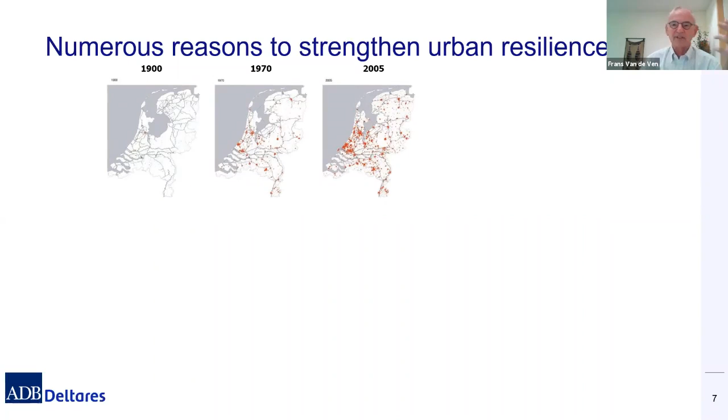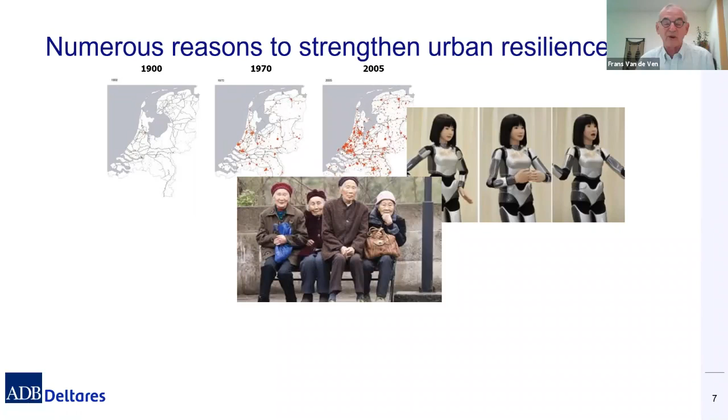But what makes urban resilience so important? Why? What is the reason to strengthen that urban resilience? And that, of course, starts with the whole issue of urbanization that is going on worldwide. Our cities are rapidly growing. But we also have an aging population to take care of. That is, the demands will change over time. We have a robotization going on in society. We are talking about smart society, about Internet of Things. That will definitely change the way we deal with our community. Like this webinar is no longer a meeting in person, but it's broadcasted via Internet.

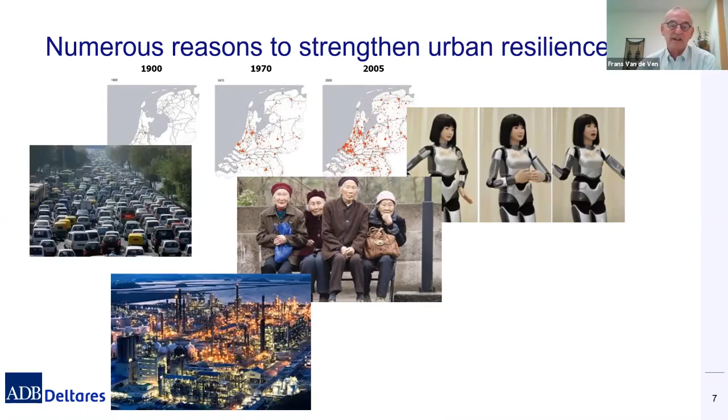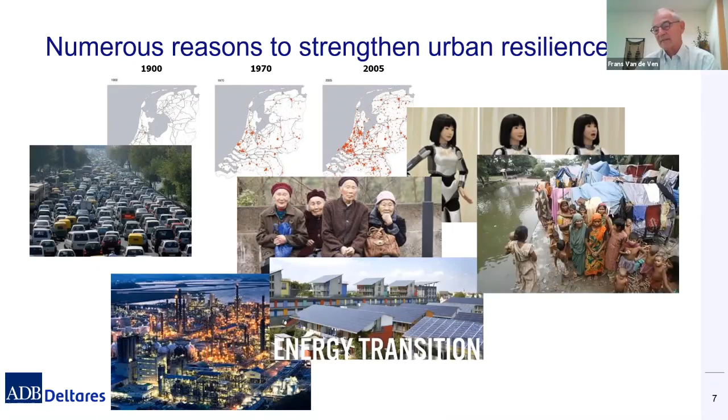We have a densification of the city going on. The city is becoming more and more dense. To avoid urban sprawl, we start densifying our cities, but that makes the risks increase over time. Mobility is changing, as everyone knows. We have an energy transition to take care of. We have gender issues and income issues to take care of in urban resilience. And last but not least, there is a lack of money all around the world.

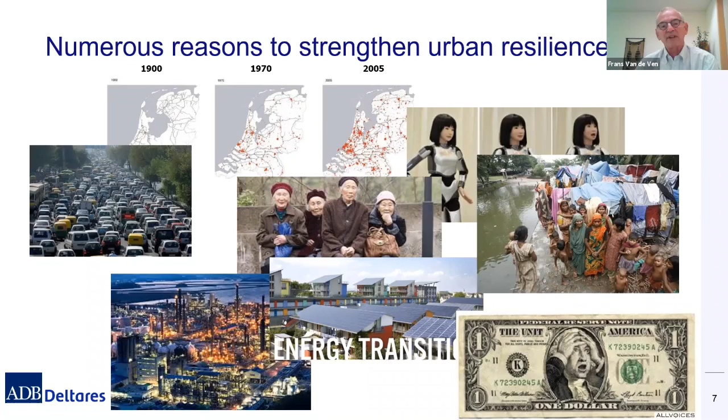So the struggle for money is going on everywhere, and so we have to be very, very careful with the budget. And of course, there is that issue of climate, not only climate change, but existing climate. We already suffer from flooding, from river flooding, coastal flooding, heavy rainfall. We suffer from droughts, not only bringing dry gardens, but also threatening the stability of our levees, introducing land subsidence and so on. And we have that heat issue.

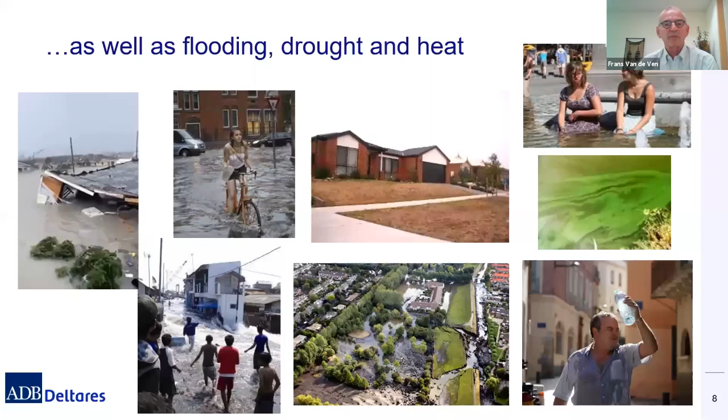And that heat issue, as is illustrated in a couple of pictures here, can only be dealt with if we have sufficient water to cool our cities. That water is an important coolant medium for our cities. But it's not only about threats and challenges that we have to talk about resilience. It's also about the opportunities to use water as a resource to improve urban resilience.

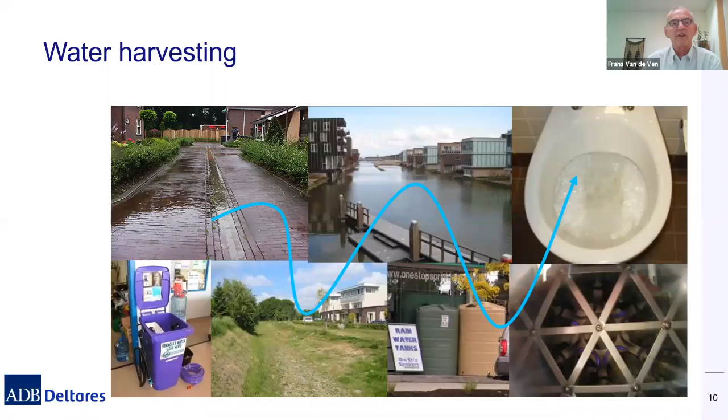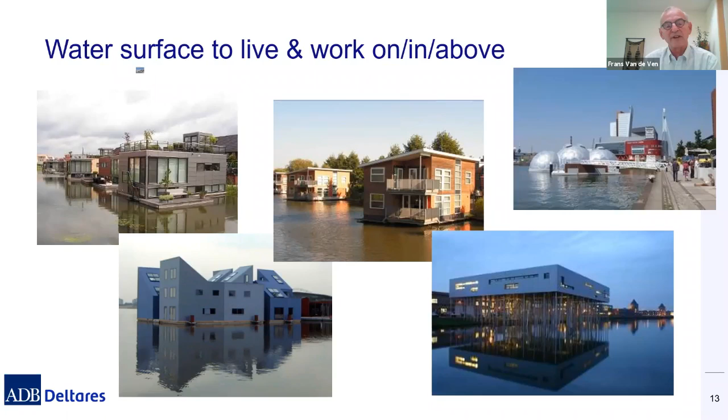To give just a couple of examples, first of all, let's think about water harvesting, about the introduction of more sources than one single source of water supply from the public tap. Rainwater harvesting is becoming an issue worldwide, I think, to diversify our sources. Then, we can make better use of these water surfaces. We can build on them. We can float on them, above them. Water surfaces are not areas that you cannot use. They can be used in very different ways in the urban environment.

Water and green are of course important for biodiversity, but can also be used for food production in our urban environment. Urban agriculture is picking up rapidly, and I think that is a way that will develop in the next decades pretty fast. Water and green is used for recreation and well-being for the people of the city. That is quite clear. Water is appreciated in the urban environment as an amenity if it is clean and accessible. So we can develop that capacity as well.

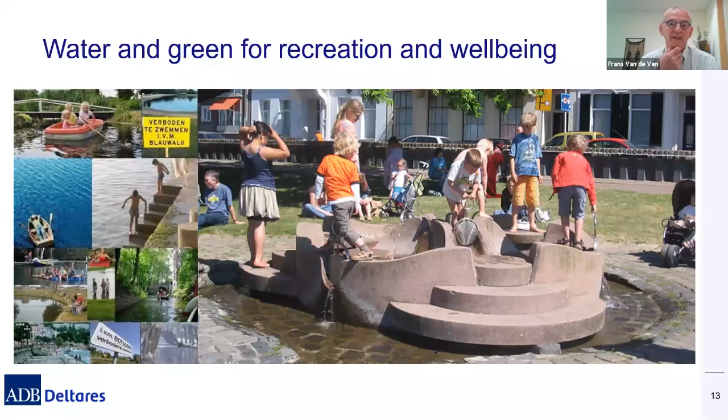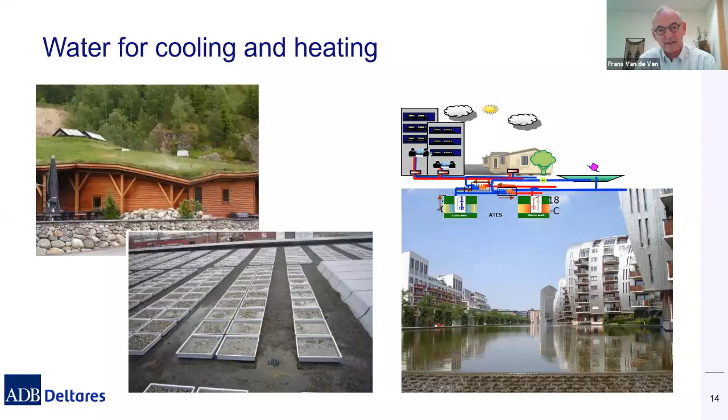And as I said, water is also a coolant for the city. So it cools the heating. But at the very same time, these water surfaces can be used as an energy collector. The water surfaces collect enormous amounts of solar heat that we can use in our urban environment for heating if necessary. All these options are possibilities to improve our resilience in our urban environment.

And that brings me to the issue of resilience planning. Resilience planning is by any means a sort of tiered approach. We have to take 3 steps. The first step is to scan the vulnerabilities of the urban environment. We call that stress testing the urban environment for climate and climate change. The second step is the selection of strategies to reduce that vulnerability and to set targets. That is an important step to prepare for the last step. And the last step is to select the adaptation measures in our environment. And I will briefly walk through these 3 steps, of course, focusing on step number 3.

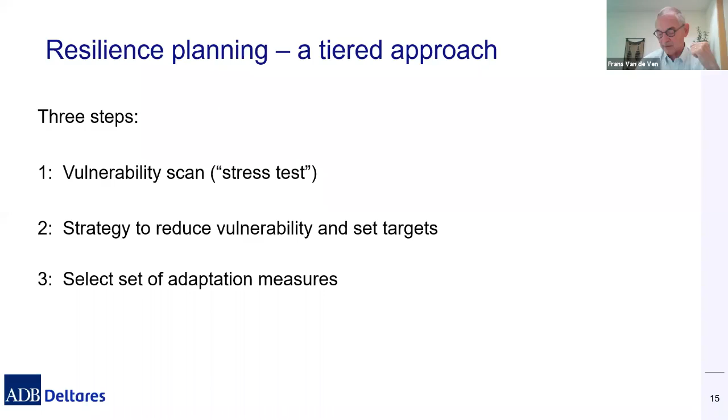Step number 1 is, of course, where we have to include issues like flood hazard assessment, to see where the hazards are, where the city is exposed to these hazards, where the risks are, the sensitive objects, where the vulnerabilities are. This is the type of analysis that is to be made in step number 1 to make a complete overview of all the vulnerabilities. This is to be done for flooding, but also for drought and for heat stress and maybe for land subsidence, so also for the other issues that are at stake in the physical environment of our urban areas.

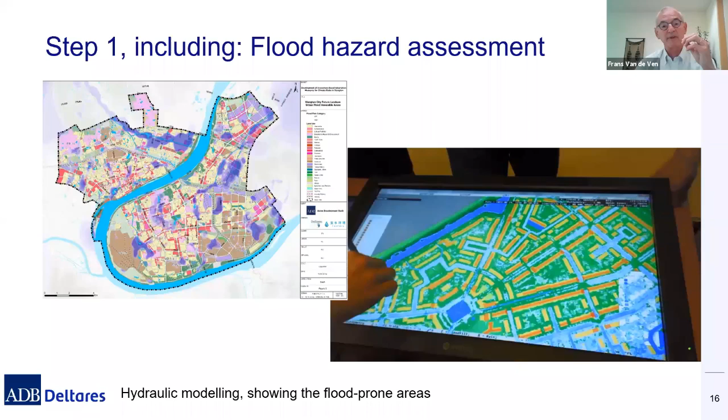Moreover, we have to take a look at the soft side of the urban environment, the governance and the institutional arrangements, to see where the weaknesses are in these institutional issues. This could be done, for example, by analyzing the so-called primo chain, making an analysis of the existing policies, the existing regulatory frameworks, the capacity to implement solutions, to maintain solutions, and the organization and financing. This is called the chain approach because the chain is as strong as its weakest link, as we know. So if one of these links is weak, we will have a problem introducing these solutions.

And then it comes to strategy, and one of the first steps in strategy that we are all very much aware of is the fact that nowadays we have to retain and store the water instead of draining the water. The Chinese term of sponge city approach is very well known. We need a sponge capacity to avoid areas being flooded. Water is to be retained and detained where it comes from the sky and stored locally, so that we don't need to drain it right away, and so that we can avoid large flood peaks in our river systems.

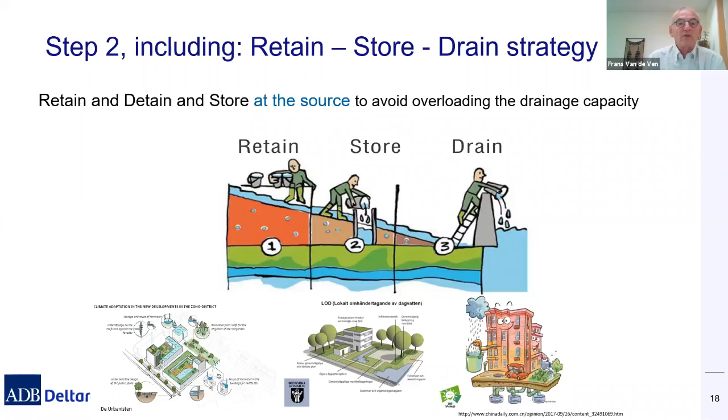But okay, that is an important strategic component. Retain and store before draining it. And that brings us to, in the Netherlands, what we call the multi-level protection strategy. At level 1, we need strong levees, strong dikes to protect us from the rivers and from the coasts in our delta areas.

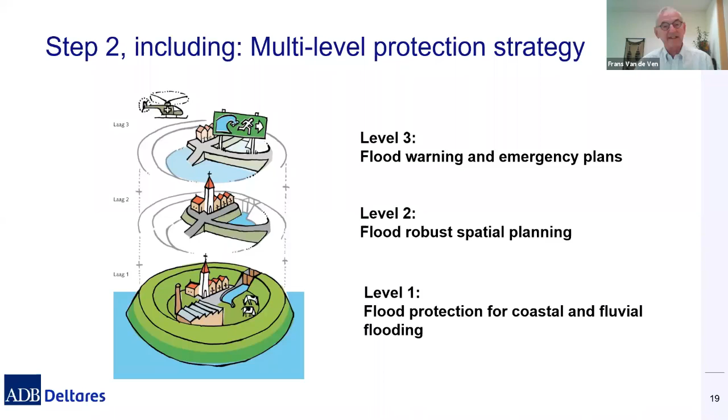But that is not enough. The fact that we create this levee system also introduces an inland area that is like a bathtub. And if it's raining heavily, that bathtub will fill up. So we need measures to avoid flooding in these lowland areas, and that's why we need flood-robust spatial planning. In addition to that, at level 3 we need flood warning and emergency plans, of course, to prepare for anything that could happen to us. This is a strategy for flood protection.

Then we need a so-called 3-point approach for resilience. And this is, I think, a very important step as compared to the past. In the past, we made an analysis of what was needed with a certain return period. And as a hydrologist, as a hydraulic engineer, we made a design for a levee or a pumping station or whatever was needed to protect us up to that certain level. Up to once in 10 years, once in 100 years flood, whatever.

But 2 more points are very important. This is a point that happens 365 times per year. That is the everyday situation. If your solution that you have designed for this extreme situation is not contributing to everyday value, well, that is a missed opportunity. So we should develop solutions that also contribute to the value of the urban environment every day.

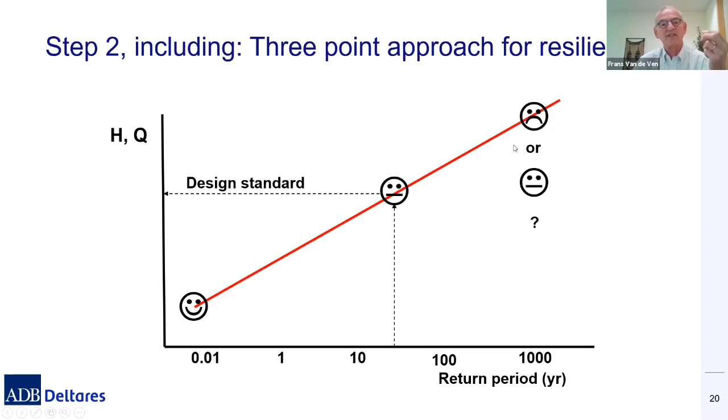The third point is another issue, and that is, well, it's clear that every now and then, whatever design we make, this criteria will be exceeded. So if you design for a once in 100-year flood, if the once in 200-year flood comes in, your system is allowed to fail. Well, when it fails, we should, of course, minimize the damage of that failing system. That is the other challenge that we have to take care of, and that is one of the strategies to make our design so that we minimize the damage of that failing system. And this is the so-called 3-point approach for urban resilience.

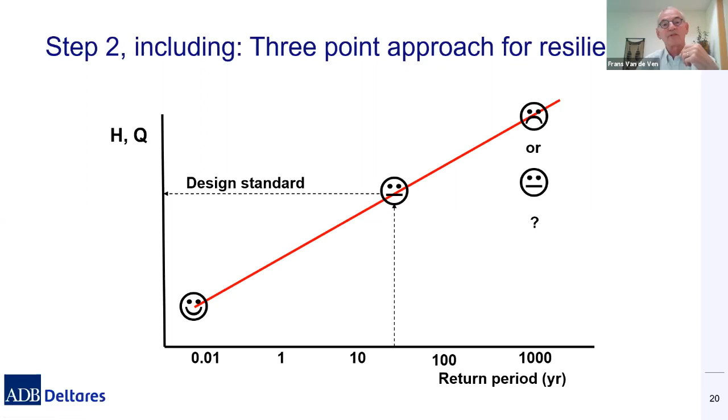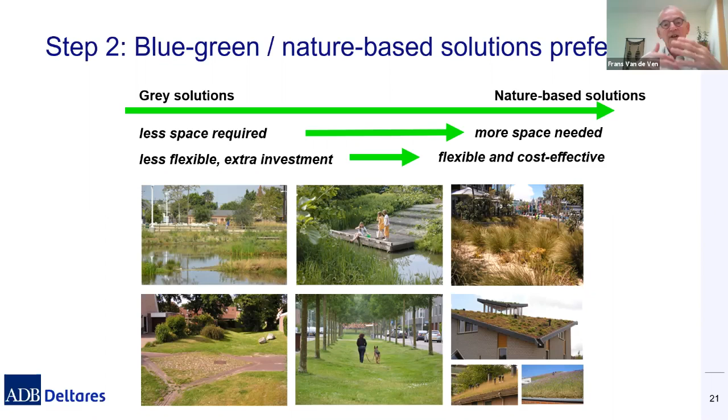And last but not least, the last component I would like to bring up is the movement we see from traditional gray, underground, invisible solutions to nature-based solutions in the urban environment. And well, let's be honest, if you see these pictures, it needs no explanation why these solutions are attractive to the urban environment. They create extra value to this urban environment and to the everyday situation. They are more flexible and turn out to be cost effective, despite the fact that they need more space. They take urban space. So this is a movement that we have to consider when we move to our next step. And the next step was adaptation planning.

Well, in that adaptation planning, we first of all have a problem to deal with. And that problem is the fact that we have simply too many solutions. It's not the problem that we have no solutions in climate resilience. It is the problem that we have many solutions, many blue, green, and gray solutions are available. Whether you call them ecosystem-based adaptation, nature-based solutions, sustainable urban drainage systems, whatever you call them. The problem is we have to make a choice.

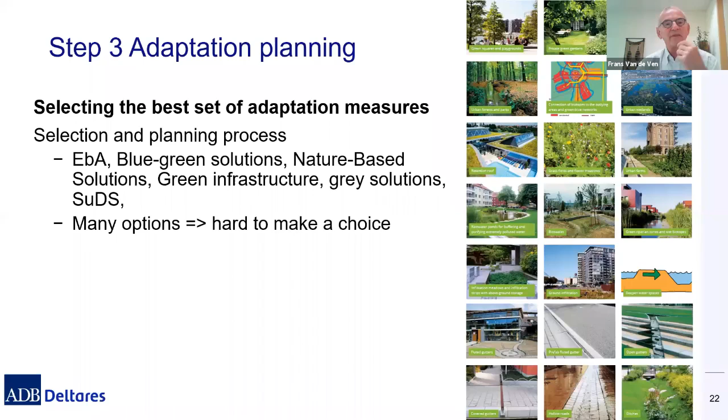And if you want to make a choice, we have to take into consideration very many disciplines and aspects when implementing these solutions. So it's quite hard to make an evaluated choice, and it's in that context we need collaborative planning. We need the co-design of solutions. As you can imagine, these blue-green solutions require many different fields of expertise: urban planners, drainage experts, landscape designers, project developers. Everyone has a say and has to have a say in the design of these solutions.

The more so because all these stakeholders have to support the plan that is to be developed and implemented in the end. Such solutions, as a result, will be very location specific. It depends on local knowledge and local preferences what will be implemented in practice. The solution for city A can be completely different than the solution for city B.

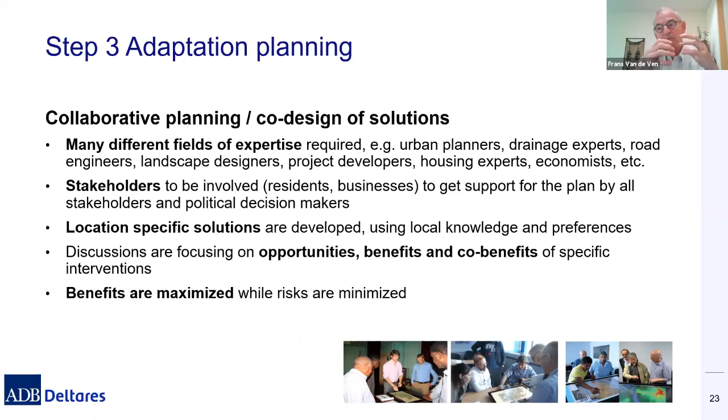Moreover, the discussions that we have during that collaborative planning process tend to focus on the opportunities and the benefits and the co-benefits of these specific interventions rather than on the cost. So there is a balanced discussion about not only the cost of these interventions, but also the opportunities, benefits, and co-benefits. And indeed, we can say that during these discussions, the benefits are maximized while the risks are minimized. And maximizing the benefits is a very important step to take in this discussion.

So if it comes to planning support tools, well, we should have support tools that facilitate and structure the discussions among all these experts and the stakeholders, the local representatives, and how to organize that process. Moreover, it should fit the structure of our planning and design process, which is often even a legal structure.

But in general, this is characterized by an initiative phase and a design phase. In the initiative phase, ending with the program of demands, and the design phase starting with the conceptual design, and then finally moving towards the final design ready for implementation.

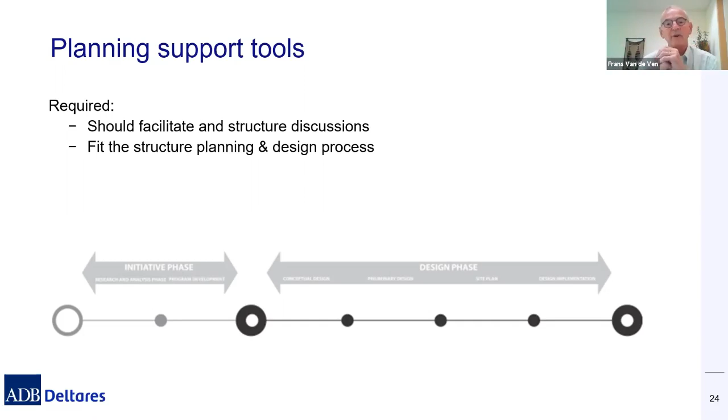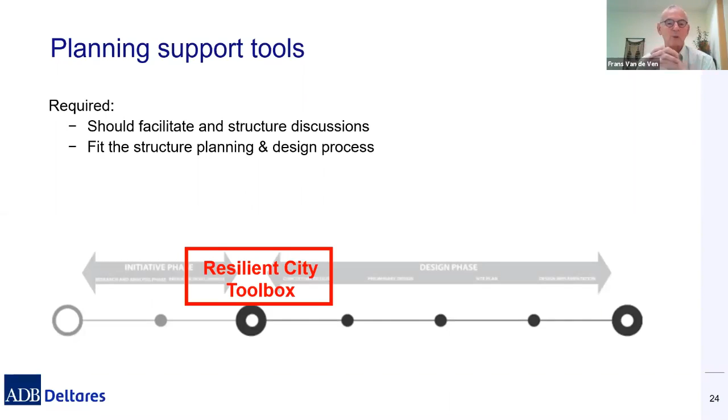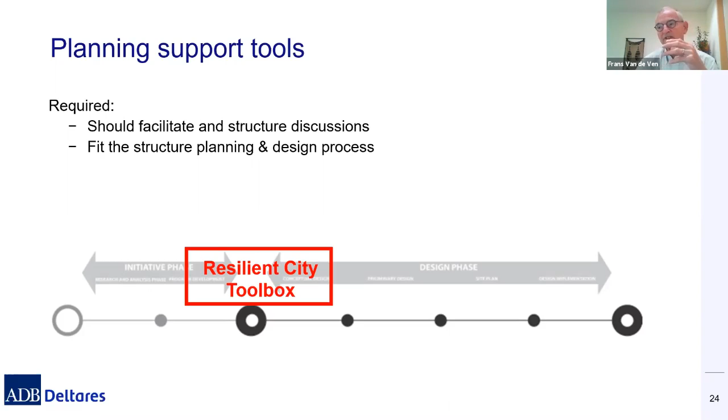And this is precisely where the Resilient City Toolbox comes in. Because at the end of the formulation of the program of demands and at the beginning of the conceptual design, that is the moment that people can sit together and discuss options and opportunities. And that is precisely what the Resilient City Toolbox is meant for. The output of the Resilient City Toolbox, as you can see, is input for the further design phase, for the detailed design.

So asking yourself the question, what is the Resilient City Toolbox meant for? Well, it is, first of all, meant to support the dialogue with all the stakeholders, the experts, the local representatives, the financiers, the constructors, about the options and alternatives. Which measures can be implemented where and how? That is the key question we would like to answer in using the toolbox.

The toolbox provides first estimates of the hydrological effectiveness and the costs of the measures. These are first estimates, enough for this preliminary phase of design, insufficient for the later phase of design, but it gives you an opportunity to discuss the pros and cons of different alternatives. And the results are shown on a map. The people are contributing to that map to see what can be done where in that area.

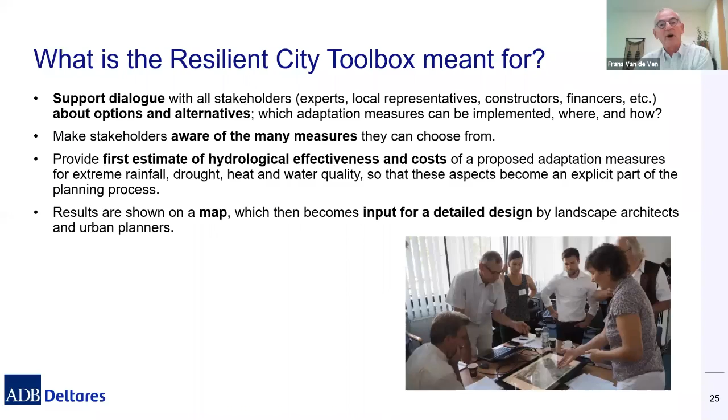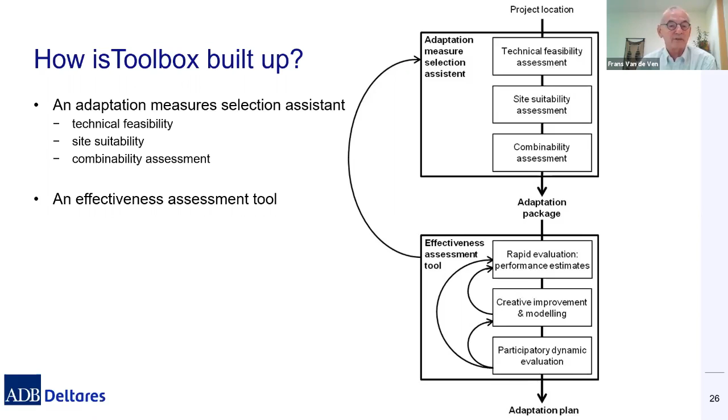Well, the structure of the toolbox is such that it's built up first with a measure selection assistant. So it evaluates the applicability of the different solutions in a specific area, given the conditions in that project area. And the next step is an effectiveness assessment tool, as we will see, to evaluate what we are projecting in that specific project area.

Indicators of the effectiveness of the measures are, for pluvial flooding, first of all, of course, the retention capacity, that sponge capacity that is needed, quite crucial in our thinking. But also a return time factor for peak flow reduction is important. For drought reduction, we included the groundwater recharge as a metric. For heat stress reduction, it is annual evaporation estimates and the number of cool spots, and moreover some estimates on water quality improvements.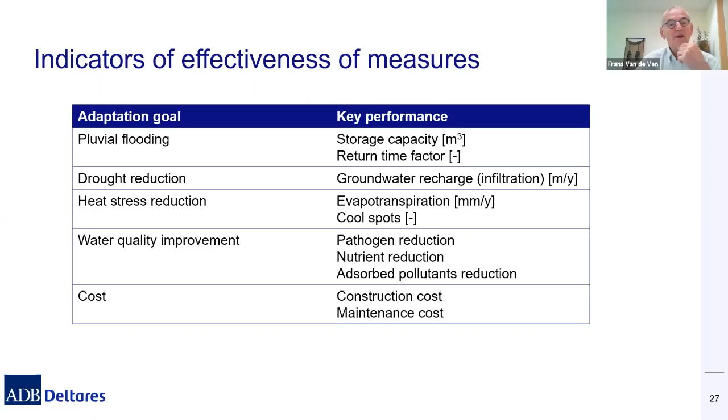And last but not least, also very preliminary estimates of the costs of construction and the costs of maintenance are included. So these are the metrics, and the hydrological metrics are calculated by using a simplified model. So not a complex hydraulic model, but an urban water balance model, a multi-reservoir model that takes into consideration the hydrological conditions in my project area. How much area is paved, how much is unpaved, what type of area is there.

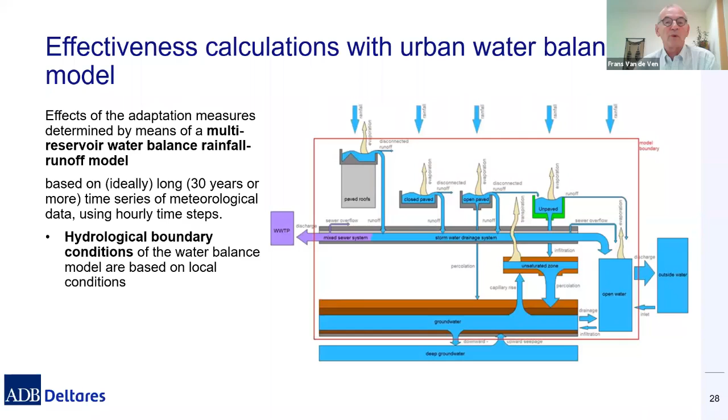We run long time simulations, and then we can estimate what the effectiveness of the different measures is. But we also need this model to estimate how much sponge capacity is needed in that project area. By having access to the land use data and to a long series of rainfall data, evaporation, climate change assumptions, and that urban water balance model, we can calculate the relationship between the discharge capacity that could be available in a specific area and the storage capacity that is required.

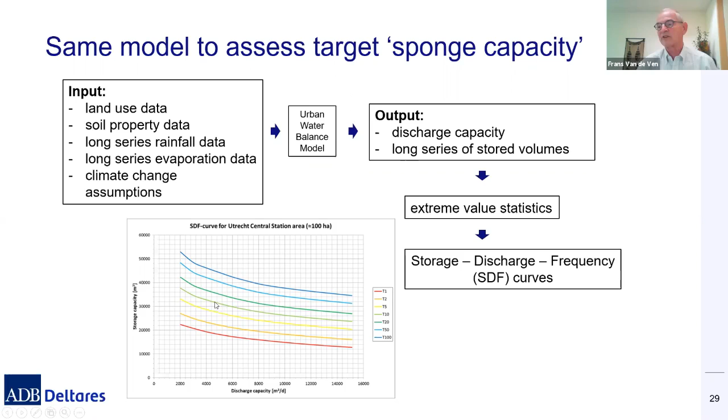Well, of course, the more you can discharge, the less you have to store. But that discharge capacity tends to be limited because you will simply flood downstream residents or downstream cities if you discharge too much. And one of the principles in hydrology is never shift problems. If you don't want to shift problems, you have to limit your discharge capacity to your downstream neighbors. So that brings us to the need for storage capacity as shown in this graph.

application. Not only the cost figures are to be adapted for an application in any country, but also, for example, the climate figures. You can imagine that a bioswale in an area with a very dry climate performs differently from a bioswale in a very wet climate. So you have to customize the effectiveness calculations if you want to apply the toolbox in a real case.

But on the other hand, you can explore alternatives by yourself, by simply using the tool, or you can co-create plans, and you can export these plans on a map with their corresponding effectiveness results. Now let me do something very dangerous, and that is switch to the other presentation.

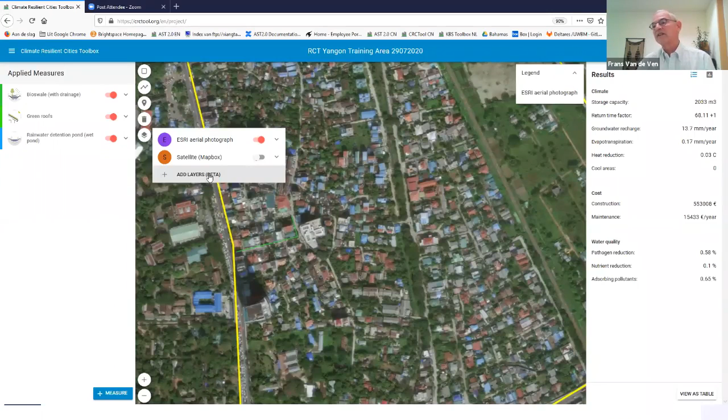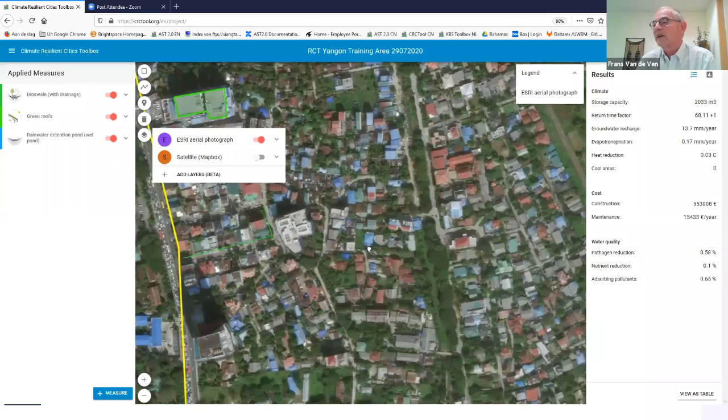And normally we add layers like the flood hazard map, or the drought stress map, or the land subsidence map, the digital elevation map. It's not included in this list, but we can add layers if available. Another issue is the fact that this aerial picture needs a high resolution, because we would like to zoom in quite close so that we can really look in someone's backyard to see what can be done there.

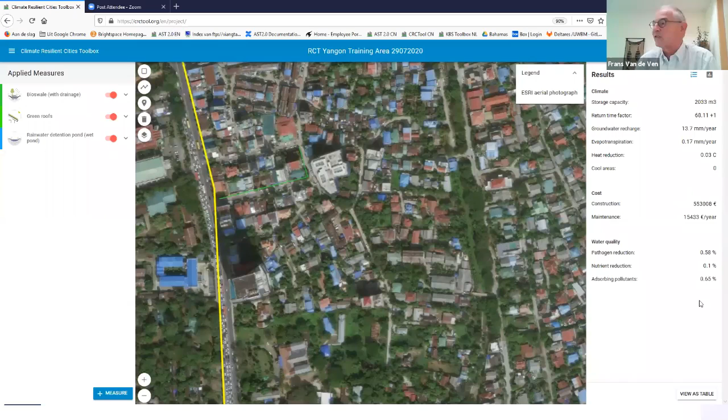That's this button. If we go to the measures, what we see to the left is the applied measures in that specific area. We can see a bioswale here, and there was a green roof and a wet pond, and this is my project area where I can zoom in and out, and this is the results screen to the right, with the indicators, the metrics shown in this study.

Suppose I would like to add a measure. I push the measure button, and now I have an overview of the measures that I can choose from. As you can see, there's a long list of measures you can choose from. And if you don't know what a water square is, for example, you can push the Learn More button. It shows you a little bit of background information on what the water square could look like, to give an impression in words and in images. This is available for all the measures included in the toolbox.

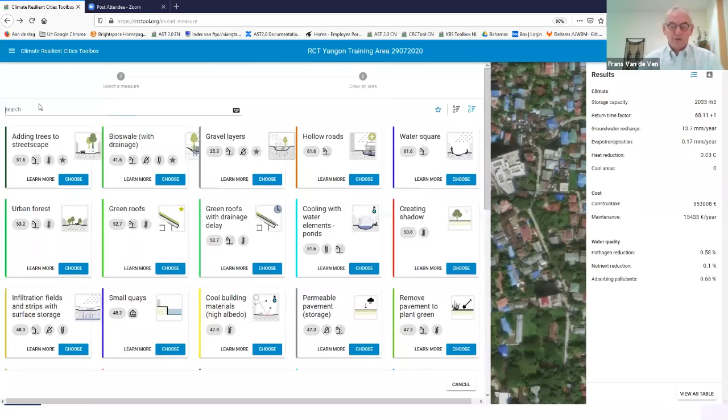But suppose that there was a nice roof that I just had in mind, and I want to go for a green roof with drainage delay in that specific area. So I say choose. What I have to do now is indicate the area where I could put the green roof. This is an areal element I'm going to add now. So I can just click the corners of this roof now. Double click is finishing it.

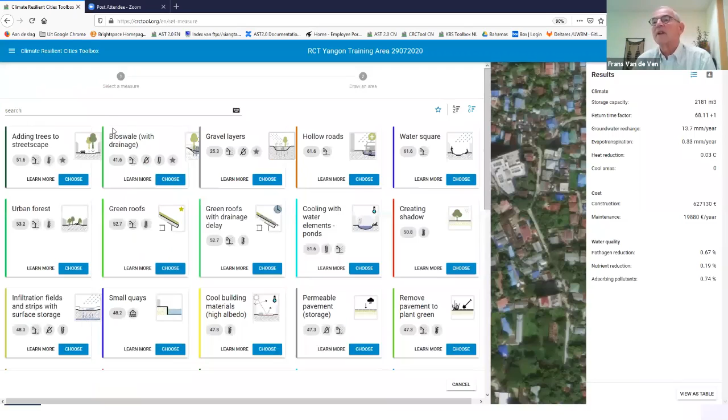And what it says now is, you selected the green roof for this building. The default water storage is 10 centimeters, but I could increase that if you like. And of course, the inflow area is 1. So if I push the Done button, this solution, green roofs with drainage delay, is now included in my solution package. Similarly, I have linear elements that I can include. Let's go for a bioswale somewhere.

I can imagine that you draw a bioswale here. Then I could introduce a linear element, say, okay, I want to introduce a bioswale from here to there. Well, now I'm doing this on a screen, but normally this is done on a touch table, put on a table that people can stand around, so that we can have a discussion on what solution to put where.

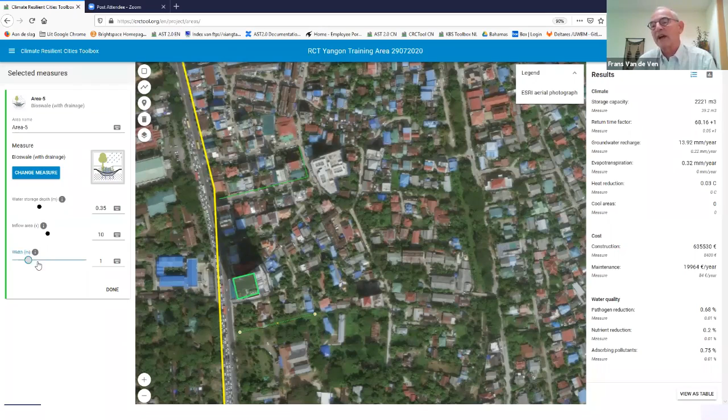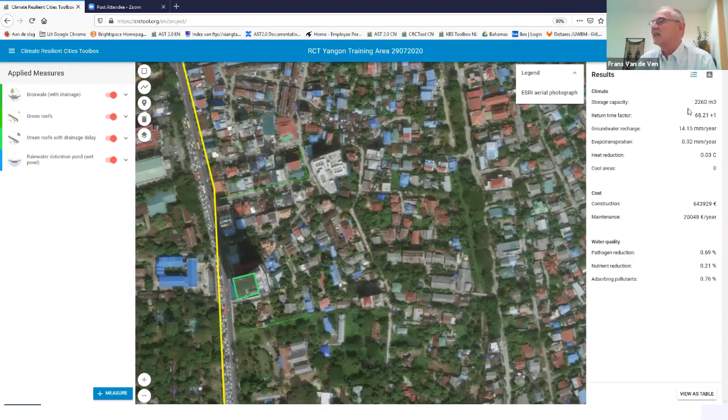Well, the water storage depth default is 35 centimeters, the inflow area 10, and the width of 1 meter. Now let's make it a wider bioswale, and push the Done button. In the meantime, you see that the figures in the results screen are changing. And if I want to know what my bioswale is doing, I can click on this. And now I can see that my bioswale created almost 79 cubic meters of storage.

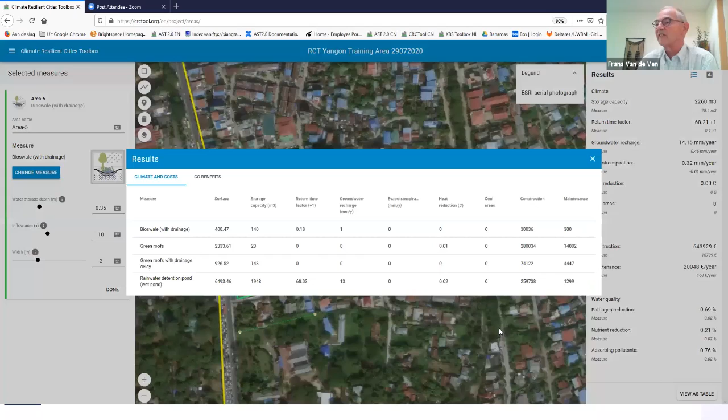It has effects on the return time factor, the groundwater recharge, the evaporation, etc. There's a cost estimate here. As I said, it's all estimated now on Dutch cost prices, so it's highly irrelevant for Yangon, but this is the way the tool works. And well, all the measures have an effect on water quality parameters. I could also show this as a table with an overview of all the results of the measures, etc.

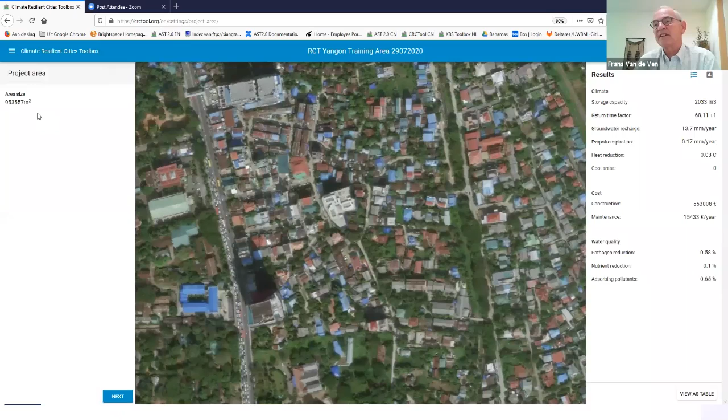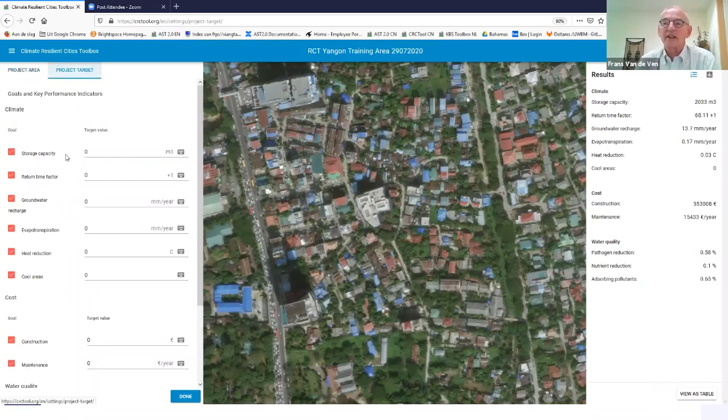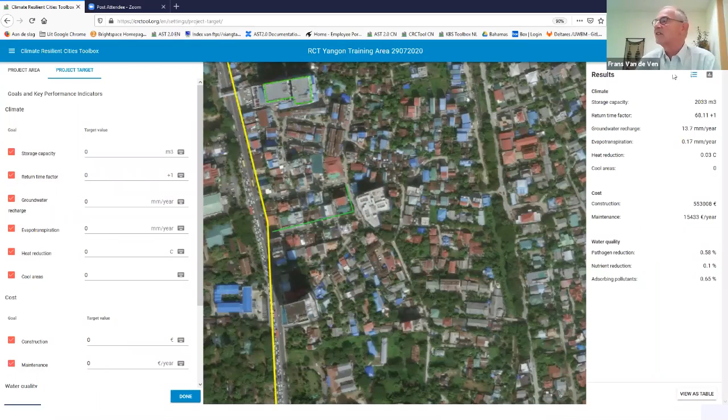Back in Yangon, I can also go to my project settings. This is the first step you take when entering a project. You have to give in the project area, and then you have to fill in a number of properties from the project area. When that is done, you can go to setting the project targets. And the project targets, like storage capacity or return time factor, you can fill in any value you want here as the target that you would like to achieve, so that the target can be compared to the realized value here in your right panel.

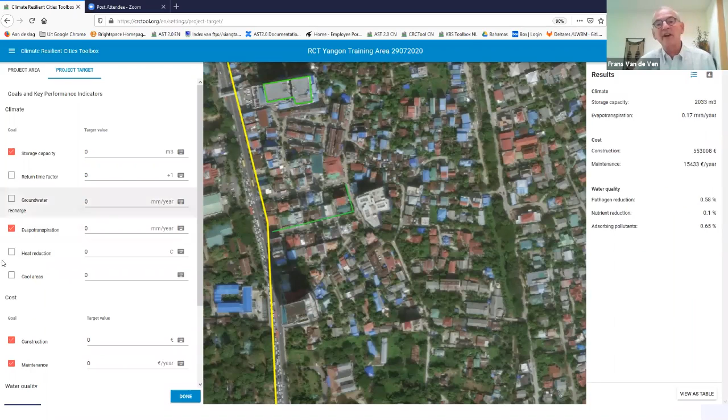And we can also illustrate that in a more graphical way by putting it in bars. Personally, I prefer the numbers, but I'm an engineer, so... but this is the way to introduce targets, and we can toggle these targets on and off if you like. Whatever is relevant, we can include them. So this is a brief demonstration of the tool.

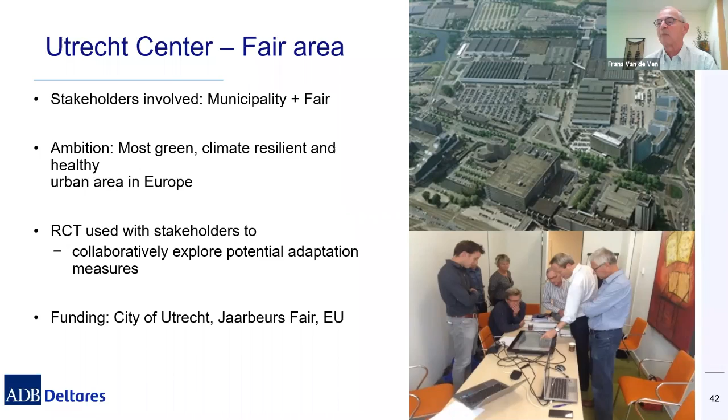And let me conclude by briefly showing a couple of applications. I'm running out of time, as I see. Well, as I said, there was a large application in the city of Utrecht, in a fair area where we used the tool with many stakeholders to explore potential adaptation options. We used that same tool and the water balance model to analyze the water balance and to see where changes in the flows would be needed. It was a very densely urbanized area with hardly any infiltration. So the question was, could we reintroduce groundwater recharge there?

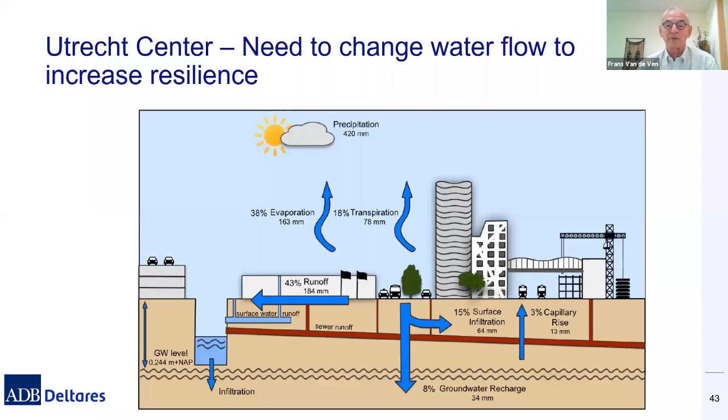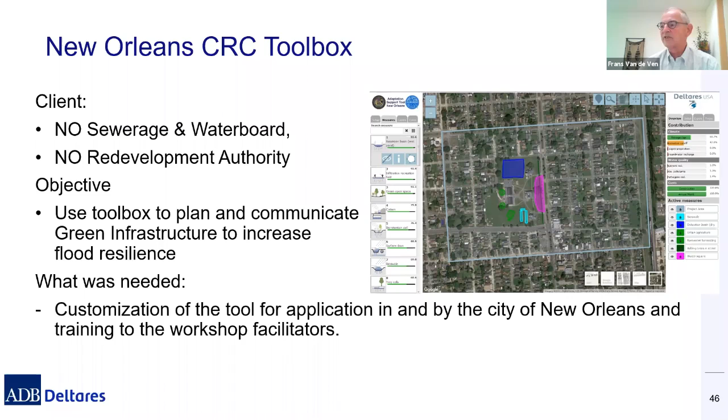Another application that is relevant is in New Orleans. We delivered a customized version of the toolbox to the city of New Orleans for their stakeholder engagement meetings. We had very intensive discussions with the stakeholders and we trained the facilitators in New Orleans so that they can have their own sessions on what could be done where in the area, so to have a wide support for all the solutions that are taken.

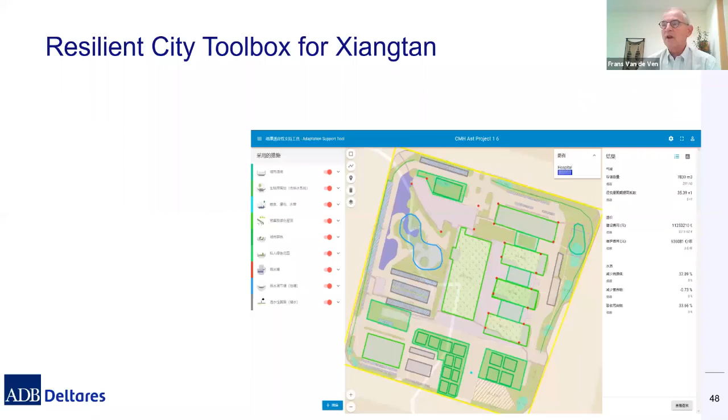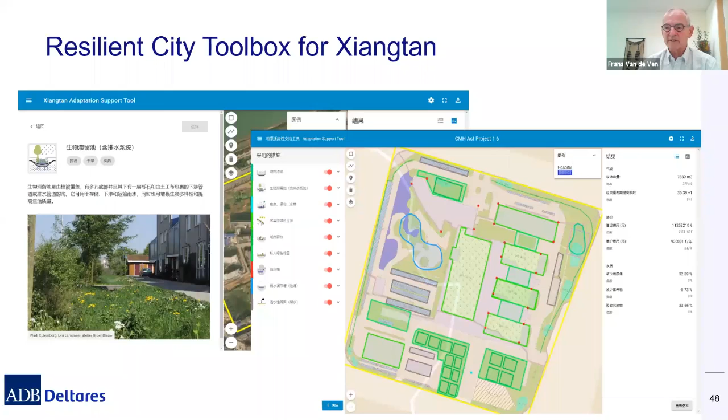And last but not least, an application for the Asian Development Bank for Xiangtan city in Hunan province in China. We developed a Chinese version and I customized that version for Xiangtan in China and applied that for both retrofitting blue-green measures in the existing urban environment, as well as for, well, this is shown here, a newly built hospital area that is projected now, where a lot of retention had to be created. As I said, rainfall intensity can be quite high there.

But once you stand around the table, you can have a good discussion with all the participants on what would be feasible and what is unfeasible in a specific area. And that is precisely what the toolbox is meant for.

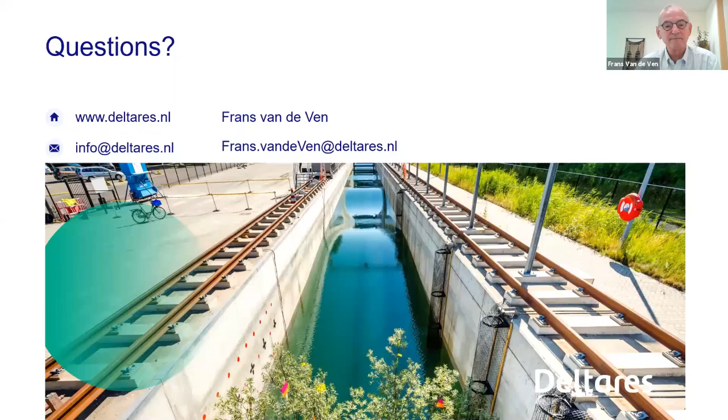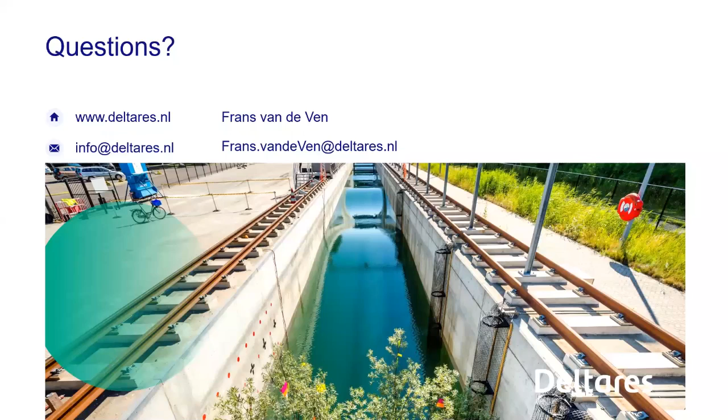In the meantime, Frans, I do have one question. There are many possible futures considering, for example, climate change and urbanization. How does the Climate Resilient City Toolbox address these many possible futures? Thank you. In 2 ways. First of all, I already showed the storage discharge frequency curves. You can imagine that you run different future climate scenarios to calculate these curves under different scenarios. That's what we did basically in Xiangtan, to see how sensitive the storage demand is given the uncertainty in the climate change.

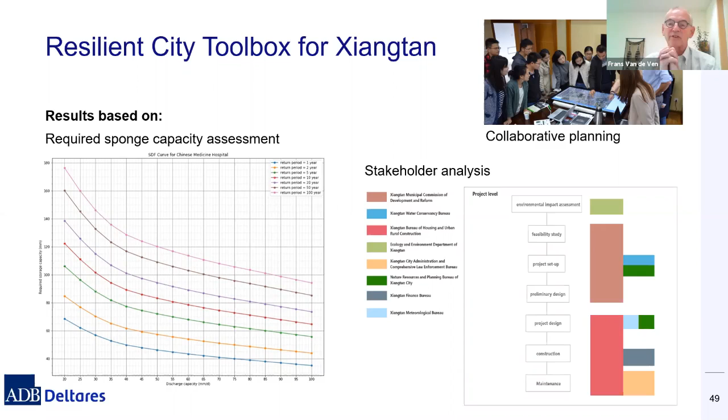That is one. Of course, there's also uncertainty in the urbanization pattern. You can take that into consideration in your urban water balance model as well to set the criteria. And last but not least, this uncertainty is of course a subject of the dialogue that takes place over the table. So that is another reason to develop different alternative plans, to see what is the most flexible solution to the future.